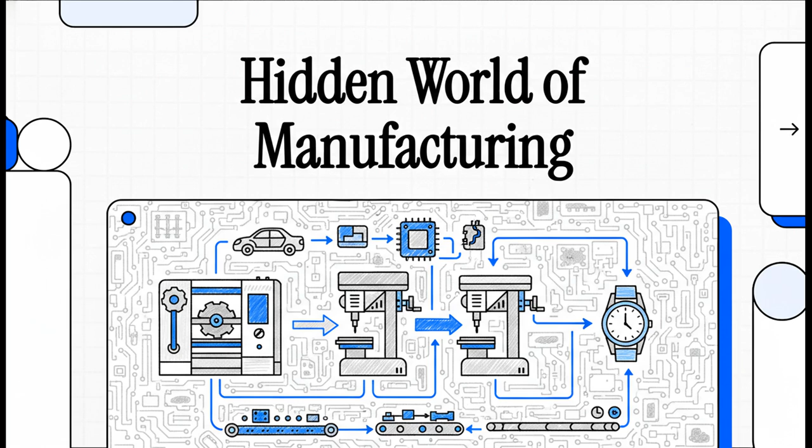Have you ever seriously stopped and wondered how the complex things you use every single day are actually made? Well, today, we're going to pull back the curtain and dive into the hidden world of manufacturing to see exactly how all those unique custom-made items come to life.

Okay, so let's kick things off with this idea. Any complex object you see isn't just one thing. It has many, many origins. You've got to think of it like a collection of different parts, and each one of those parts has its own unique backstory for how it was made.

I mean, really think about it for a second. A car has that solid, heavy engine block, right? But it also has those smooth, perfectly curved body panels. And then there's the detailed plastic dashboard and the crystal clear headlights. Every single one of those pieces is wildly different in its material and its shape. So how in the world can one factory possibly make all of them?

And that question, right there, that gets us to the heart of what we can call the production puzzle. See, it turns out that making a million of the exact same thing is one kind of challenge. But making just a few of many different things, that's a whole other, way more complex puzzle to solve.

You know, when you picture a factory, you probably think of a classic assembly line, right? Robots and machines just doing the same task over and over and over again. And yeah, that setup is perfect for pumping out identical soda cans, but that whole system just completely breaks down the second every single item coming down the line is unique.

And this really shows you the two completely different worlds of manufacturing. On one side, you have line production. That is all about volume. It's simple, it's linear, it's repetitive. But on the other side, you've got job shop production, which is built for variety. Its goal is to make lots of different items in small batches, which means the process is super complex, and the path each part takes is anything but a straight line.

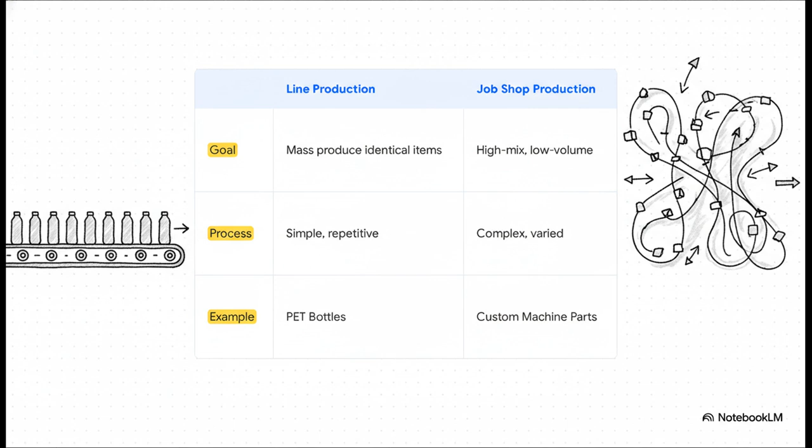So how do you solve this puzzle of making so many different, unique parts? Well, the answer is the hero of our story today, the job shop. So a job shop isn't just one single rigid assembly line. No way. It's much better to think of it as a flexible network of super specialized workshops.

You might have one shop that's all about shaping metal, another that's an expert in molding plastics, and a third that handles painting and finishing. Each part travels on its own custom route from one shop to the next, getting exactly what it needs to become a finished product. Now, as you can imagine, all this flexibility comes with some massive challenges.

You have to juggle tight customer deadlines for hundreds of different orders all at the same time. And every single time a machine switches from making one part to another, there's what's called setup time, which costs money and brings production to a halt. Trying to manage all of this requires an incredibly sophisticated schedule. It is a constant, high-stakes balancing act.

To really get a feel for this, let's go on a quick tour of some of these shops. We'll start with the ones that shape and form metal. This is where the raw strength of our products really comes from. First up is casting, and this is one of the oldest manufacturing methods there is. It's pretty straightforward. You melt metal down into a liquid, you pour it into a custom mold, and then you just let it cool and harden.

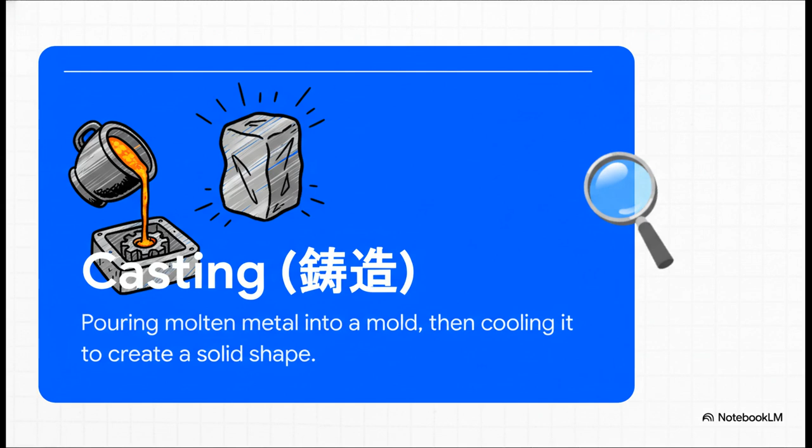This whole process is perfect for creating really large, complex, and incredibly solid shapes from scratch. And you see the results of casting pretty much everywhere, from the engine block inside your car to the heavy manhole cover on the street. It's all about creating that strong, foundational shape right from the get-go. Next, let's visit the forging shop. For this one, just picture an old-school blacksmith with a hammer.

Forging involves heating metal until it's red hot and kind of soft, then using immense force to press or hammer it into shape. But what's so amazing about this is that it doesn't just change the metal's shape, it actually compresses its internal structure, making it unbelievably strong and durable.

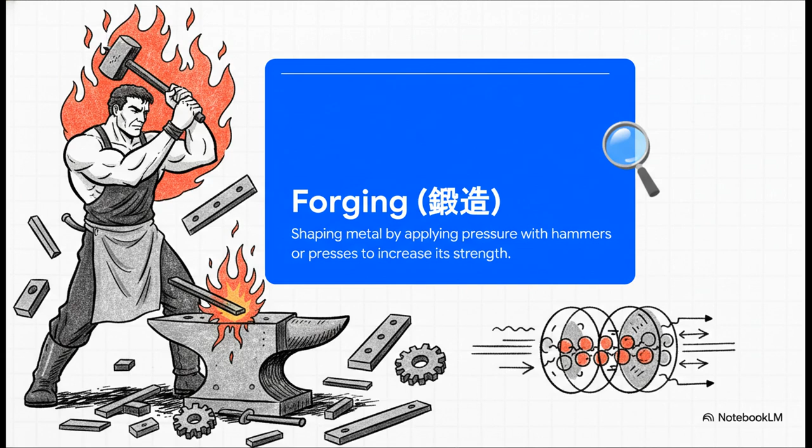And this is exactly why forging is used for things that absolutely, positively cannot be allowed to fail. Think about high-quality knives that hold an edge forever, the wrench in your toolbox, or those critical components buried deep inside a car's transmission. They are all forged for maximum strength.

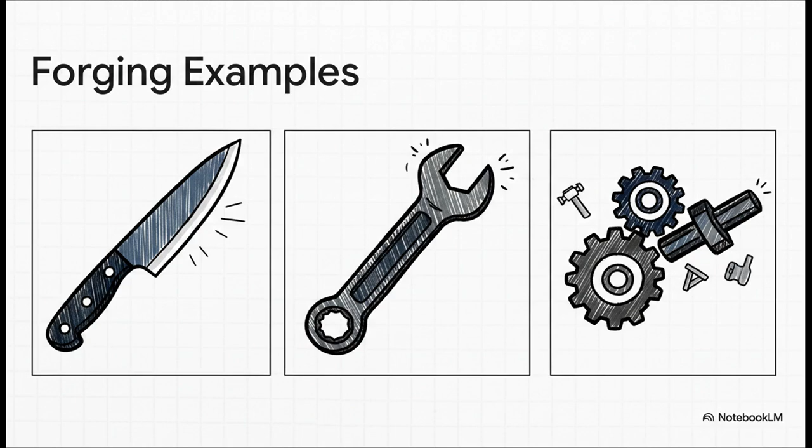All right, our last stop in the metalworks is the pressing shop. Here, instead of working with molten or red-hot metal, we start with a flat sheet. That sheet gets placed between two massive, custom-shaped molds, and then a machine applies hundreds of tons of force to stamp it into a three-dimensional shape in just a blink of an eye.

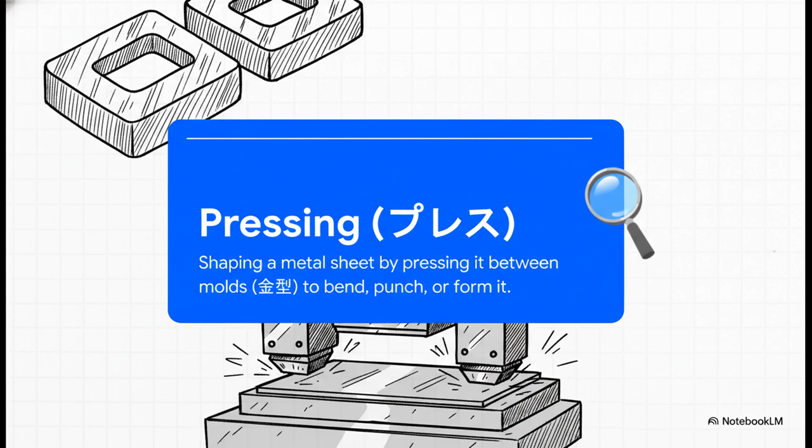And this process is how we get those smooth, perfectly curved surfaces on so many products we use. The doors and the hood of a car, the metal casing on your washing machine, or even a stainless steel kitchen sink. That is all the power of the press at work.

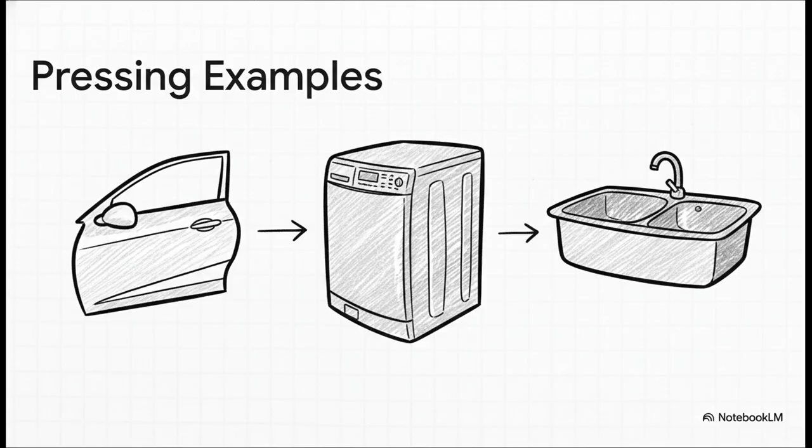Okay, so we've seen the raw power of the metalworks. Now let's shift gears and enter the super versatile, high-tech world of plastics. Now, the undisputed king of plastic production is a process called injection molding. It's kind of like casting, but with a high-tech twist.

Pellets of plastic are melted down and then shot under extremely high pressure into a very precisely machined mold. The plastic fills every single nook and cranny, cools almost instantly, and bam! Out pops a perfect, solid part.

This process is the reason we can have such incredibly detailed and complex plastic goods. Your smartphone case, all the intricate little pieces of a model airplane kit, even the tiny cap on a water bottle, they were all born inside an injection mold.

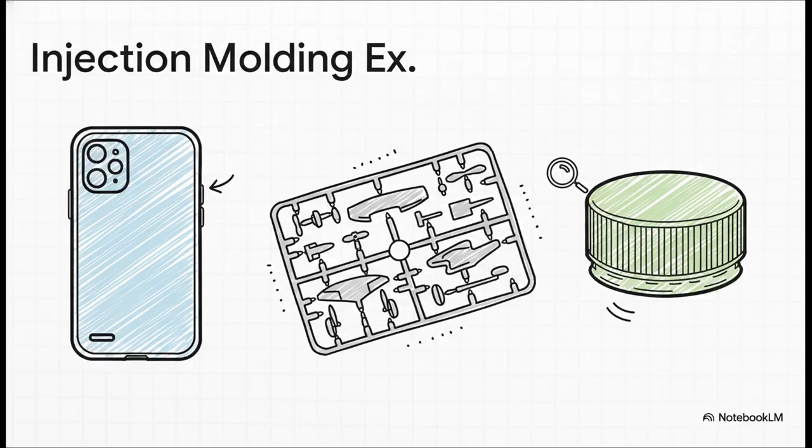But what about hollow things, like bottles? Well, for that, we go to the blow molding shop. Here, they take a tube of hot, soft plastic and place it inside a mold. Then, air is blown into the tube, which inflates it just like a balloon until it pushes against the walls of the mold and takes on its shape.

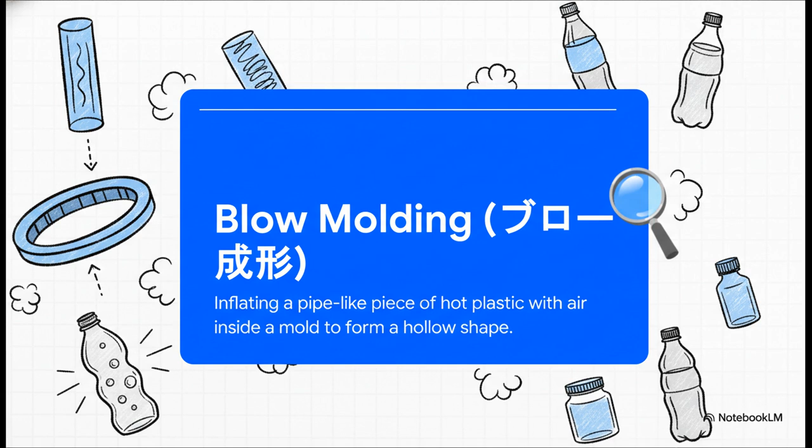And this beautifully simple process is responsible for creating almost every hollow plastic container you can possibly think of, from the PET bottle for your soda all the way to a sturdy tank you might use for storing liquids.

So, our parts have been cast, forged, pressed, and molded. But believe it or not, they're still not finished. The journey continues to a whole series of shops that add the final touches, bringing everything together. So, once they're shaped, metal parts might head to a welding shop to be permanently joined together.

From there, a lot of parts will go to painting, which gives them both protection from the elements and that final polished look. After that, it's off to assembly, where all the individual components we've seen, metal and plastic alike, are finally brought together. And the last, absolutely crucial stop is inspection, where everything gets checked to make sure it meets the highest quality standards.

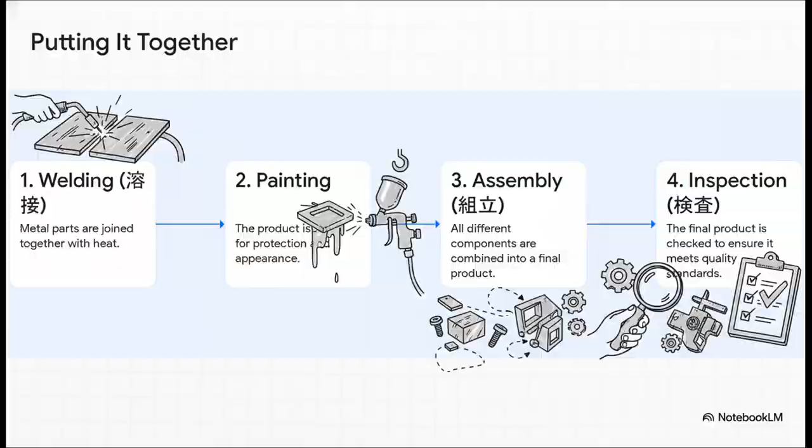So as you can see, there is no single straight path. That car door started as a flat sheet in a press shop. Then it visited welding, then painting, and finally assembly. The engine block? It began in a casting shop and followed a completely different route. The job shop is this invisible network that masterfully manages all these unique journeys all at the same time.

So, the next time you hold your phone, I want you to really look at it. It's got a forged metal frame for strength, probably an injection molded case for all that detail, and perfectly polished glass. Now that you know the language of manufacturing, can you kind of trace their journeys back through the job shop? Pretty cool to think about, right?